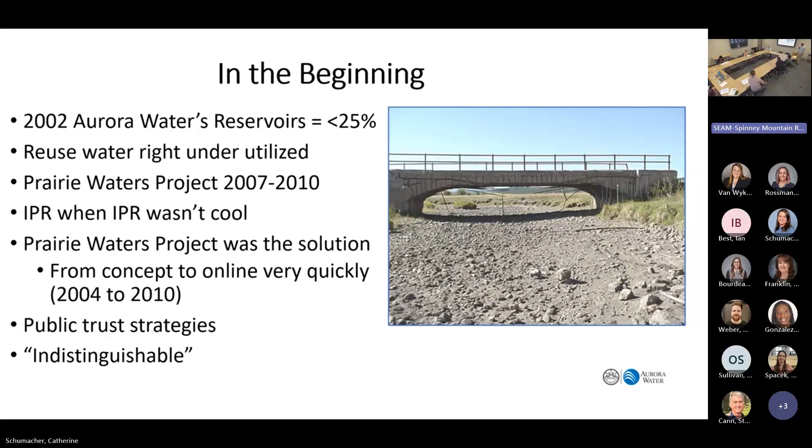Next slide. Okay. And so this was the Prairie Waters System. I'm sure all of you are real familiar with it, but just as a recap, we capture up north of Brighton, around Weld County Road 8. We have vertical wells there right now. We take that water out of the river through riverbank filtration. We get a lot of really excellent treatment through the riverbank. It's kind of passive. We get lots of carbon removal, and some removal of biodegradable contaminants like NDMA.

And then that water gets pumped 34 miles and lifted 1,100 feet till it shows up at the Binney Water Purification Facility, which is right across the street. When it gets to Binney, we have some advanced treatment in place. When the water first gets there, back to our indistinguishable goal, we have softening. We want the water to be softened so it matches the water already in the system. So we have precipitative softening.

Then we have advanced oxidation, which is a very highly effective process where we're using high doses of UV light and hydrogen peroxide. We're not concentrating contaminants, we're actually breaking chemical bonds and destroying contaminants. Most of the contaminants this process removes have persisted through the wastewater plant and are now in the South Platte River, and it does really well at that.

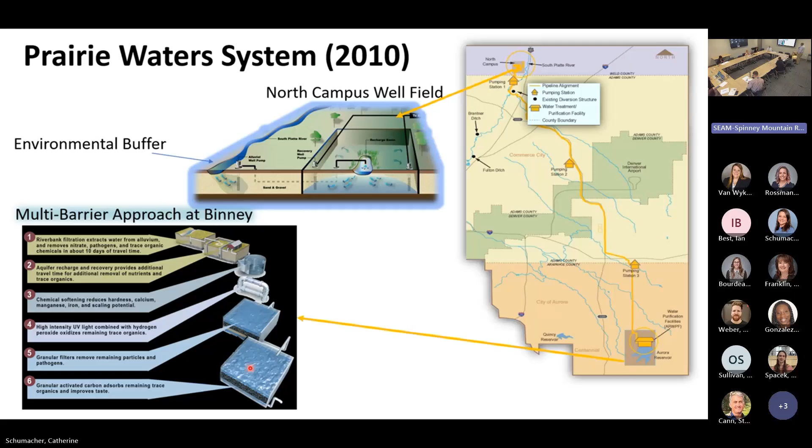And then remember, we have the Aurora Reservoir train, and we blend those two trains together, disinfect it, and send it to our citizens. The reason we blend it is that's how we manage our total dissolved solids. So we call that our multiple barrier approach. We think it's really effective. We've been doing that 15 years now, and so we've learned a lot. We think we can do it very effectively and very efficiently. Next slide.

I know there's a lot on this slide, and I apologize for the small print, but in the lower left-hand corner, we have a lot of the contaminants that persist in the South Platte River through wastewater plants and industrial discharges and all those things that make up our source water. We have everything from sugar substitutes to flame retardants to antibiotics to herbicides, lots of stuff. What I do want you to pay attention to is as we move from left to right across the table, the number of colored cells diminishes till at the very end, we have hardly anything left.

This is kind of like our report card. You all remember this was $650 million for the Prairie Waters Project. So it's good to step back and ask ourselves, does it really work? Was it worth all the effort? When I look at this, I think it was. We're removing a broad range of contaminants. And the good thing is the multiple barrier approach allows us, if one of the processes isn't performing exactly right, and we try to do everything we can to make sure it does, to still remove that contaminant other ways. So we think it's very robust, very resilient, and we've been really happy with that.

Can I ask, with fentanyl being such a thing in the news, you include that in one of the categories, pain medication or whatever. Is that easily removed? So I think we remove fentanyl through the adsorption process as well as a little bit through the biology in the filters. We look at all that stuff, and Roy's trying to see what's on the horizon. We actually have a really nice pilot plant at Binney. That allows us to try different things, because the pilot plant water never gets to our customers.

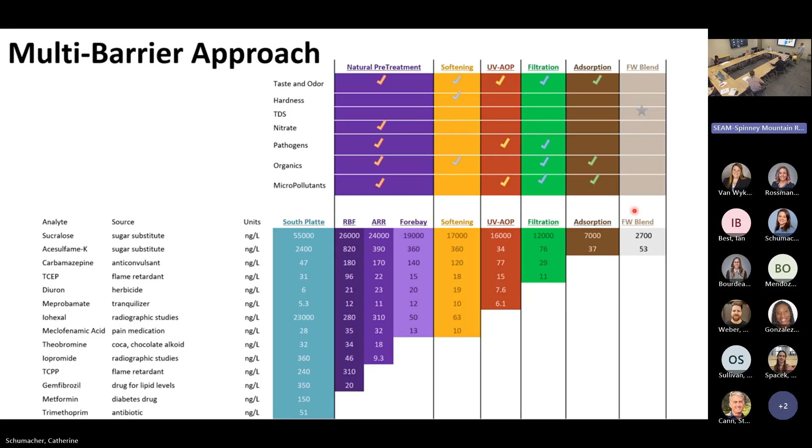So when you get to the end where you've removed all this, can you tell exactly what's left? Absolutely. Oh, okay. Yeah, and we do extensive analysis, because when we started doing this, part of the reason we thought the multiple barrier approach was important is it's very effective, but we also felt that from a public trust perspective, we wanted to be able to say we're doing everything we can to make sure this water is as safe as it could be. And we still feel that way. So that's our report card. We're proud of that. Next slide.

One thing to keep in mind when I talk about indirect or direct potable reuse. Indirect potable reuse is what we're doing now. The water leaves the reclamation facility, goes to what's called an environmental buffer, which is our South Platte River, then goes to an advanced water purification facility, which is Binney, and then we deliver it to the distribution system. The environmental buffer is either a surface water or some place for the water to stop in the middle for dilution or natural attenuation of pathogens and chemicals.

With direct potable reuse, we do away with the environmental buffer. I think that provides us some advantages, because we have a much more controlled, characterized water that we're bringing into the plant. In the South Platte River, we know a lot of what is in there, but there are a lot of illicit dischargers and a lot of things in that river that maybe we don't know about or that are very dynamic. When you go pipe to pipe, you have a very well-known water matrix that you're bringing into the advanced treatment plant. So keep that in mind as we go back and forth.

So we evaluate the water coming from our wastewater systems before it goes into treatment? Yes. Okay. Yeah, we do. That's right.

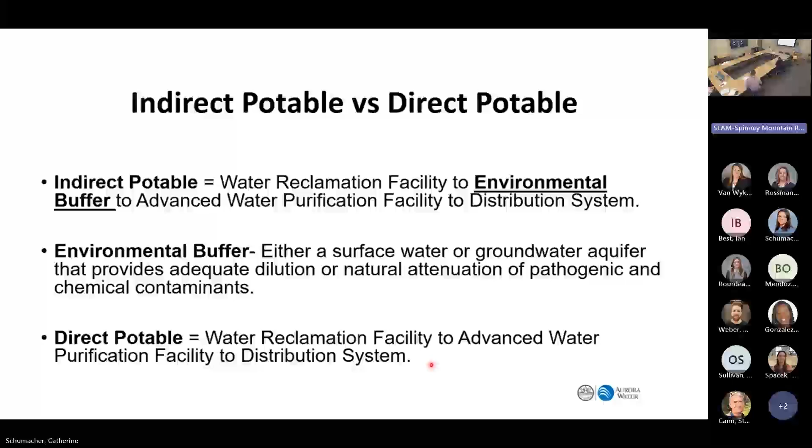Very interesting question. Catherine's going to get to that on the next slide. Any other questions about any of this stuff I talked about? I'll come talk to you more in a little bit. Catherine's going to talk about where we're at with our evaluation. All right. So actually, to answer your question, Kat, why haven't we done it before?

So the drivers for evaluating DPR, the main one was we finally got a regulation. The state finally put together a regulation and a policy that would give us a framework for how to put it in an application to execute a DPR system. So we finally had the roadmap. You couldn't permit it. It wasn't allowed in the state before.

So that regulation just came out in 2023 and it uses Regulation 11. And then they have two policies underneath that regulation, Policy 15 and 16. One is specific to DPR and the other is specific to what we call enhanced source water control. And we'll talk about that in a little bit. So we finally had an avenue to execute that evaluation.

Also, to add on to what Kevin was saying, we were underutilizing the water rights for reuse. So that's another tick box, like, hey, let's evaluate DPR as well and really try and use all of our water rights for reuse. Obviously, the system and the population keeps growing regionally in the city. So another driver was we need additional buckets of water to pull from, as well as the untapped capacity of our system.

So Prairie Waters, right now, I'm sorry, let me do the second bullet first. Right now, the system uses about 5 to 10 MGD using the Prairie Waters indirect potable reuse system, but we designed Prairie Waters to 50. So there's this big gap, but we can fill that with potentially a DPR system.

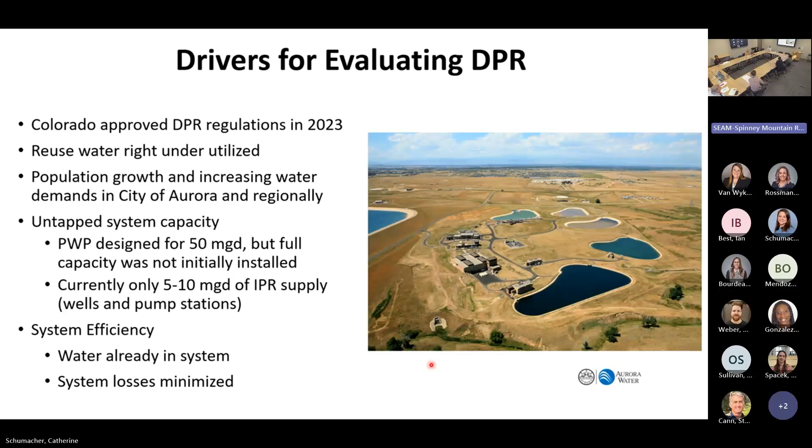So that all led to setting up this DPR evaluation project within Aurora Water. So Kevin and I kind of got appointed as co-chairs. And we're like, okay, what do we want to do? What's our goal here for this evaluation project? The first thing was, let's understand the policy. Let's try to figure out how we could execute this policy. How do we check all the boxes of how we get through this application and make sure it's worth it?

We also were like, well, how much do we want to deliver in DPR? You know, we want to diversify our source water portfolio. So we thought about it. We talked to various folks and we're like, okay, let's set a goal of maybe 5 to 10 MGD to customers before 2030. We wanted to set that battery limit. Like, what's the quantity of DPR we would be comfortable with in the near term?

So then one of the goals was, well, how are we going to implement this? What do we need to do at Binney? Do we need to change anything at Binney? Do we need to change anything at Sand Creek? What does the implementation look like? And how do we support that through the application?

The other piece was, we can't do this in a silo. We can't do this in a box. We have to engage with stakeholders. We have to develop a management plan for internal and external stakeholders.

And so once we had all those goals kind of lined out, we're like, okay, we need a team. Kevin and I can't do this alone. So we established the task force. I think it's a cool name, the task force. And what we did is we aligned ourselves with subject matter experts within the utility that check the boxes of the various elements of the policy.

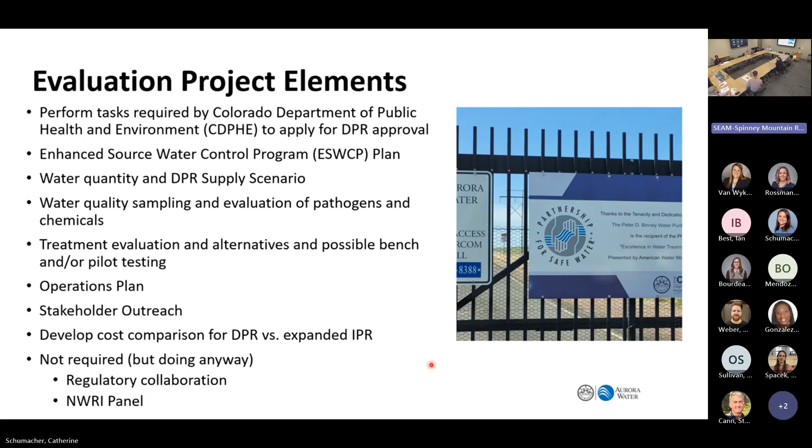Okay. I'm talking fast, I'm sorry.

Again, the regulation came out. Everyone was kind of like, ooh, let's look into this. Let's see if it's valuable to us as well. So they approached us and asked if we wanted to be a part of a regional DPR study.

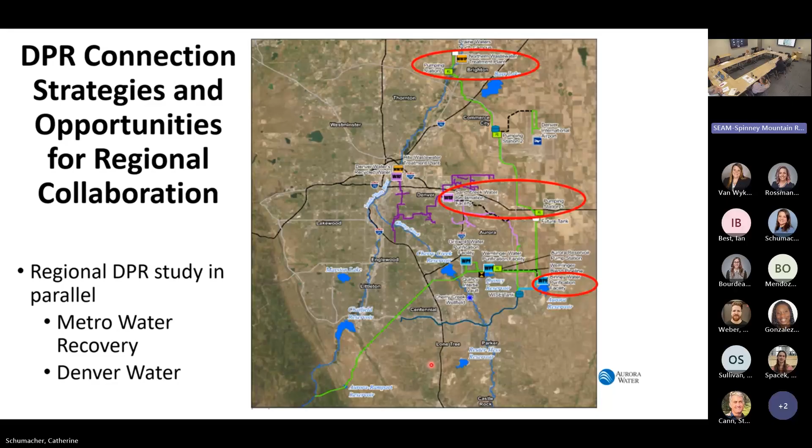So taking a step back to enhance source water control. What that means is there's these sewer sheds that capture all the flows that go into the reclaimed facility. So whether that's Northern Treatment Plant, which is kind of off the map, or Sand Creek right here, or Hite, there's these big areas that are capturing all that sewer shed water and getting treated at the reclamation facility.

So as part of this regulation, we have to understand our source water again. If this reclaimed water is going to be used for us, we have to understand what's coming into that sewer shed. So there's these existing programs, like Metro already does this for these areas where they go out and they understand these significant industrial users, and they figure out who's adding to that influent water.

So we worked with Metro to figure out resourcing: if we went with either connection point, how much more staff would that be for you to execute this program? And we came up with 3 additional staff for Sand Creek and 2 additional staff for NTP. So that's all part of the information we're using to evaluate the connection points.

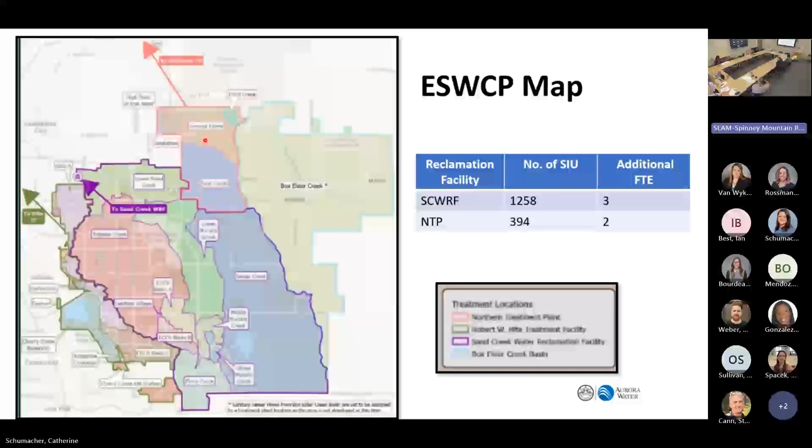On that one as well, presumably one of the industrial operations discharging at Sand Creek is the refinery, Suncor. Suncor, yep. It's one of the 1,200, yes. Okay, so that's enhanced source water control, big lift for the regulation, lots of coordination for that one. All right, now I'm gonna turn it back to Kevin.

So let's talk about where we're at so far with this evaluation. We established our water quality goals for the advanced water treatment plant finished water. Some of that was already existing. As you know, we're Partnership for Safe Water plants.

So a lot of our goals are in alignment with Partnership for Safe Water, but some of the goals we had to develop are based on the analysis we've done on the water coming into the sewer shed and what the plant would have to treat, and trying to identify target chemicals that'll help us know, hey, we'll put an alarm in the SCADA system. So if this gets above this number, we know we need to act right now. And so the analysis has been a lot, but it helped us identify some of these water quality goals.

So like we mentioned, we've been evaluating two potential connections, the Sand Creek, which we connect to Pump Station 3, or the Metro Recovery Northern Treatment Plant, and we connect that to Pump Station 1. And we've mentioned it a bunch of times, but our goal is somewhere between 5 and 10 MGD at or around 2030. So with Sand Creek, the current capacity is 5 MGD. But as I mentioned earlier, a part of Sand Creek's identity is the non-pot, right? That's been a big foundational piece. And in the summer, that's 3.5 MGD. So that only leaves about 1.4 MGD for DPR.

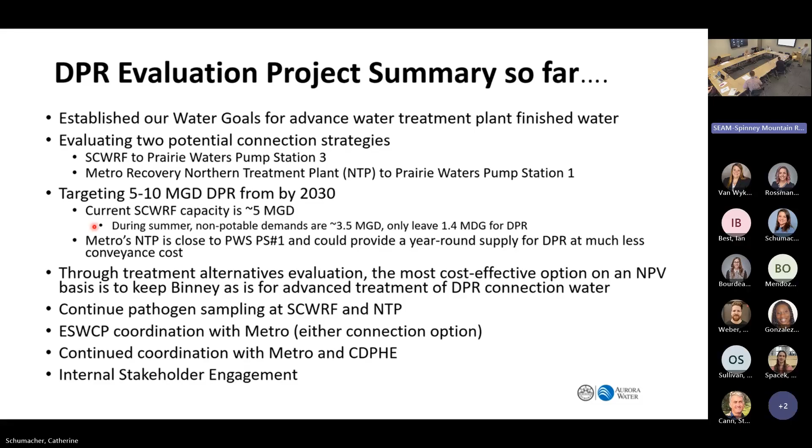Next slide. So we talked about cost, and it's a little bit of a busy slide, lots of stuff, but I'm going to talk about four DPR implementation options. One is using NTP effluent. One is using Sand Creek effluent with no upgrades to the plant. The third one is Sand Creek effluent with upgrades to the plant. And the fourth one, we felt like it was always important to compare it to doing no DPR.

So some of the assumptions we're going to make: all the options are going to be in alignment with the Integrated Water Master Plan 2 findings that said we need to have a goal for the Prairie Water System of 20 MGD by 2030, 30 MGD by 2040, and 40 MGD by 2050. We wanted to estimate capital costs. We wanted to estimate O&M costs on an annual basis. And we wanted to incorporate any additional DPR costs that we could come up with at a class 5 level. We also calculated the amortized total capital cost over a 20-year period with a 3.5 increase and added it to the annual O&M cost, because that's kind of industry standard for how we do this.

So another busy slide, but I'll laser point for you.

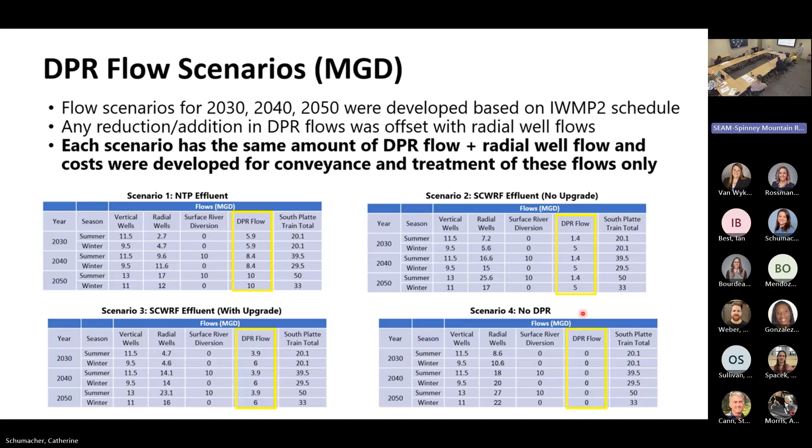Thanks, Catherine. Okay, next slide. This is a lot too. Lots of crowded slides.

So just some additional considerations, some of the stream losses that we're incurring currently with IPR versus in the future if we go toward DPR. Right now, when you discharge water into a receiving body, stream losses are calculated using 0.5% per mile in the summer and 0.25% per mile in the winter, and that's due to evaporation. And there's also approximately 1% of system losses assumed for the operation of gravel pits for water augmentation that John mentioned. And the calculations are based on 25% of radial flow routed through the gravel pits.

Currently, Colorado does not require accounting for losses between the river and the well, but we know there are some, right? Because we're pulling water through dirt and through gravel, so we're going to lose some there. And then on average, the DPR at NTP receives a 3% stream loss credit, and Sand Creek receives a 9.4% stream loss credit averaged over the year.

And the difference in that is because of the distance from where that water is discharged into the South Platte to where we pull it out at the North Treatment Plant. Sand Creek discharges from higher, which is farther, right? So Aurora uses a cost of $32,000 per acre foot, applied as a one-time fee. So DPR going pipe to pipe, if we did scenario one, which was NTP effluent, was 10.8 million savings.

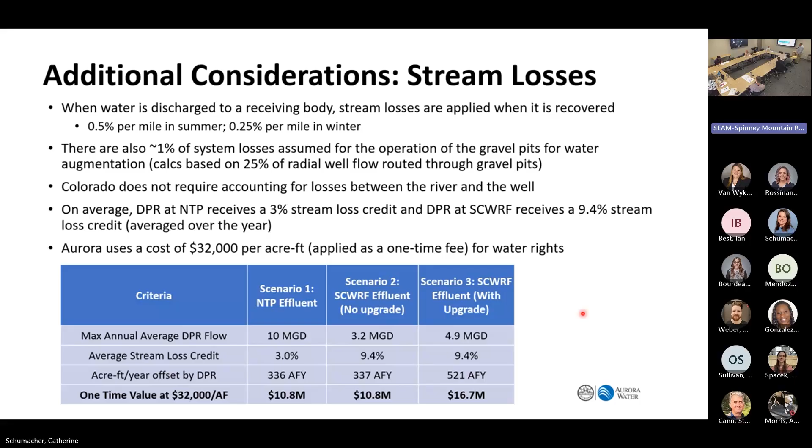Next slide. So I think the punchline is what, Kevin? Yeah, I'm sorry. So the punchline is when we did this number crunching, NTP still came out to be less expensive than the other options. And a lot of that was captured in the capital cost for building it, because one of the things that's cool is we have an advanced water treatment plant. So we're not starting with a blank sheet of paper. So we tried to leverage that, and we do realize that factors into it. So the NTP option was significantly less.

Now Shawnee's turn. So Shawnee, unpack that. Yeah, so one of the things that we went over a little bit earlier is as part of Reg 11 there are actually very prescriptive requirements in terms of what you have to do for public communication. And it makes great sense. So as we are in this phase of evaluation right now, today, May 21st of 2025, we are already thinking forward about permit application. Those prescriptive requirements that I'll talk about in the next slide have to all be done 60 days prior to permit application. We're thinking about permit application sometime in 2026.

So in 2025, we want to really remind everybody that we're already doing indirect potable reuse. And you just heard a great presentation on how we have this advanced water treatment facility that was 20 years ahead of its time in a lot of ways. So really just providing that understanding to people and reminding them, because one of the things that we found is that most people don't realize they're already getting potable reuse. And also to remind folks that we live in a region where water supply availability is just not what it is in the east, right? It's a very precious resource.

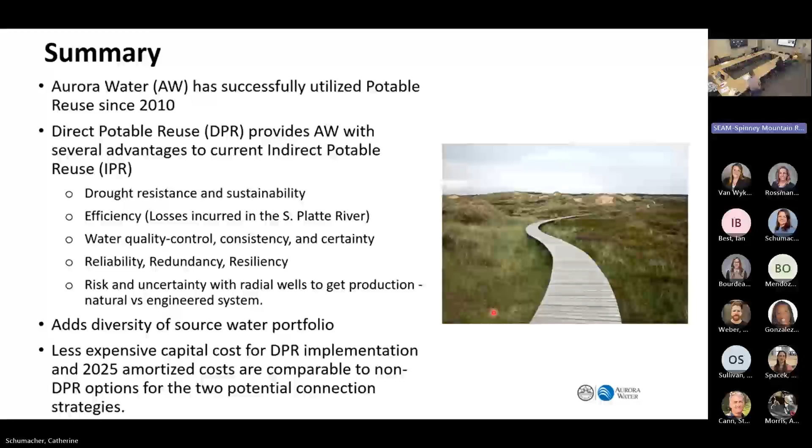And like I mentioned earlier, it is less expensive capital costs for DPR implementation, and 2025 amortized costs are comparable to non-DPR options for the 2 potential connection strategies. So we feel that we can check all our boxes. DPR is a really good solution for us to continue to evaluate for Aurora Water and the citizens of Aurora.